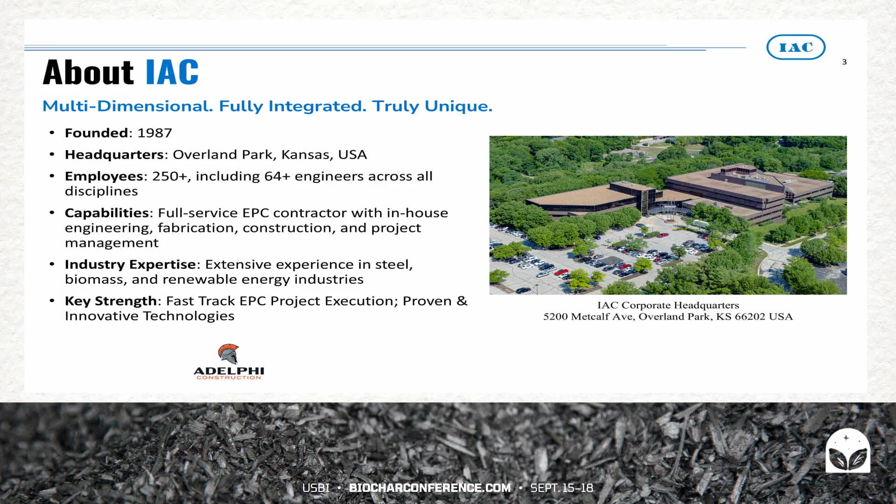A little bit about what we do: we're really kind of an opportunistic EPC contractor. EPC, for those who don't know, stands for Engineering, Procurement, and Construction. Not only are we a contractor, but we are an OEM of air pollution control equipment, primarily dust collectors for particulate control, fine dusts, as well as for hot process gases. Also, we have a thermal group that produces rotary dryers. We've done that in the frac sand industry and in the biomass industry as well, for drying wood products and dried distillers grains in the ethanol industry.

Our focus is primarily on industrial plants, large-scale plants, which Tom Miles and others in their report about 2 or 3 years ago mentioned would be somewhere in excess of 100,000 tons per year. Some may be smaller than that, and we're not going to turn away a project because it's 50,000 tons per year, for instance. But typically, when you build a plant of that scale, you're looking for a reliable plant that's going to run 24/7, 8,400 hours a year.

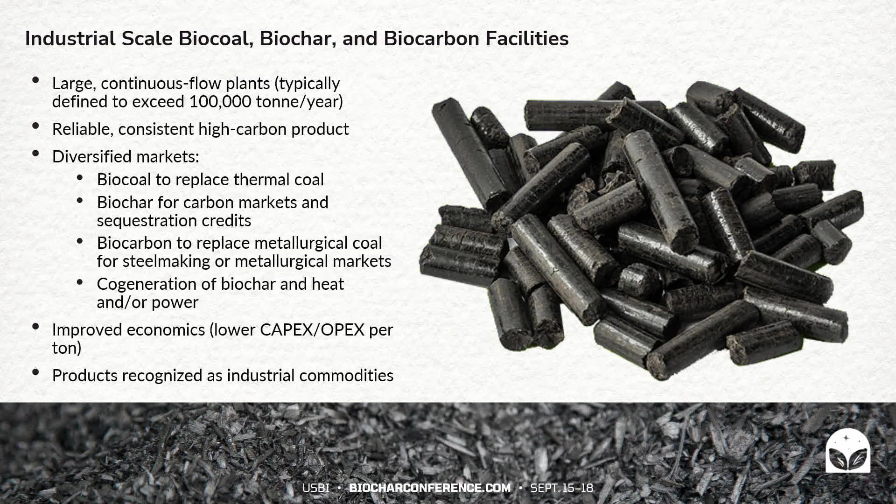And the economics nowadays may very well dictate that you need to do this. In order to do a lot of that, you may have to co-locate a plant near an existing facility, whether it's a pulp mill or an ethanol plant or other potential user, a customer for your heat. Also, the economy of scale for a large plant allows for a lower CapEx and OpEx per ton. And this product is typically going to be recognized as an industrial commodity at these levels.

What we're seeing now is a great interest. There's going to be a demand for electrical energy here in the U.S. because of certain drivers: electric vehicle adoption, shuttering of some of the fossil coal-fired power plants, population growth, climate impacts perhaps from additional air conditioning needs, load reserve requirements. As the demand increases, the utilities have to maintain a certain load reserve as well. Tremendous data center growth, which is occurring at present, cryptocurrency mining, and AI growth, which is going to be, from what we hear, a tremendous driver. A lot of interest from all the large Silicon Valley folks.

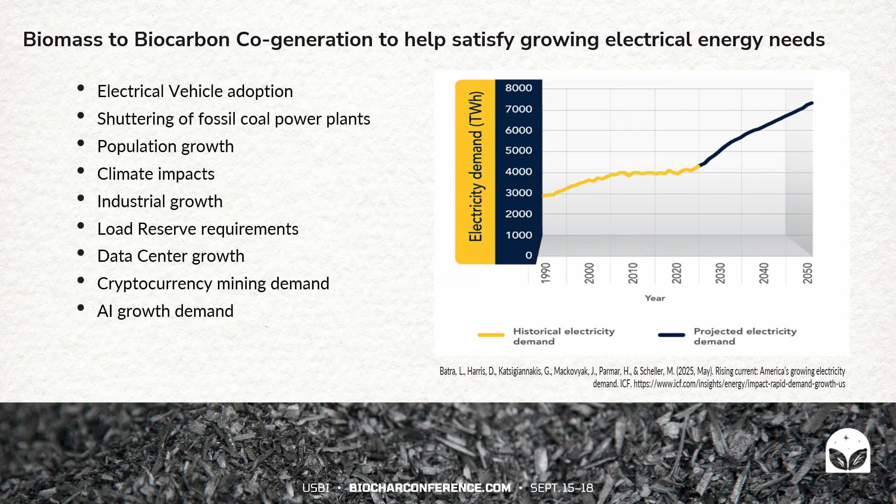Looking at the raw material resources that are available from the 2023 billion ton report assessment, there is over 1 billion tons of available raw material resources, of which forest products is just a small part. If you look at the currently used biomass for energy, a lot of that is essentially corn for ethanol production, oil seeds for biodiesel production. There's a bit of MSW that provides for energy needs. But there's a great interest in forest lands for either fire mitigation, remediating those areas of the forest that are beetle kill, and also to utilize those raw materials that would normally decay naturally. Rather than that, let's take those, let's process those, refine those, so that we can create a biochar that could essentially be sequestered for maybe 1,000 years. So, doing our part to try and reduce carbon emissions.

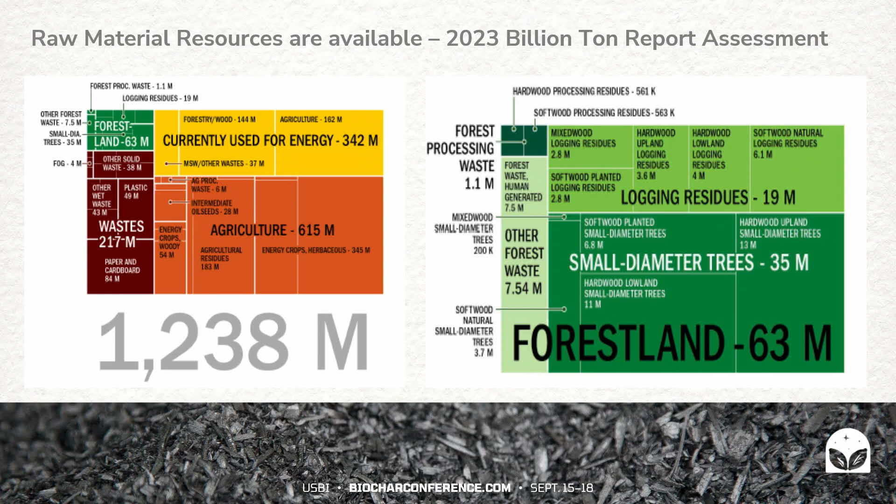One of the industries we've been involved with over the last few years has been the ethanol industry. One of the plants we helped participate in building was Red Trail Energy, located in North Dakota. Originally we installed that plant, along with 3 others, coal-fired fluid bed combustors that then went through a heat recovery steam generator. We placed the emission control equipment behind that, some large bag house collectors along with the ash collection, handling, and storage.

And then because it was coal, we also introduced dry sorbent injection to try and mitigate whatever kind of heavy metals might have been in the coal to begin with.

But the ethanol industry is very active now in pursuing other markets. They've always been forward-thinking. Rather than just producing ethanol as a fuel, they co-produce dried distiller's grains or wet cake if it's not dried, and corn syrups. There's a very pure stream of carbon dioxide emitted from these ethanol plants, which is either marketed to the beverage industry, or now they're looking at sequestering it or using it for enhanced oil extraction. So it demonstrates that once an industry is established, it has the opportunity to bolt on additional markets.

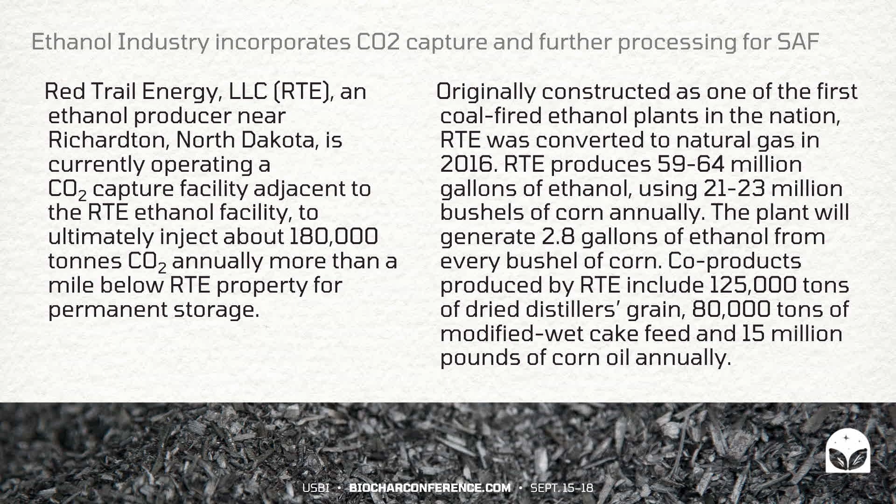So when you look at industrial scale biocoal, biochar, biocarbon cogeneration facilities, there are a number of segments. Those include the transportation routes into, out of, and around the plant, whether by road, rail, or water. The raw material storage and pre-processing, whether it comes in log form, or as chips from the forest where they've been chipped, or potentially large bales if it's corn stover, or maybe sugar cane bagasse or waste from the fields that comes in large bales and must be further ground and processed.

Usually that material needs some amount of drying. You might have moisture content of 50% water. So there'll be a drying step followed by thermal processing, pyrolysis or gasification, and then product cooling once it leaves the thermal process. Depending on the final form factor your customer is looking for, it may be pelletized or at least densified, which may involve adding binders and then cooling it. So that's the solid portion of it.

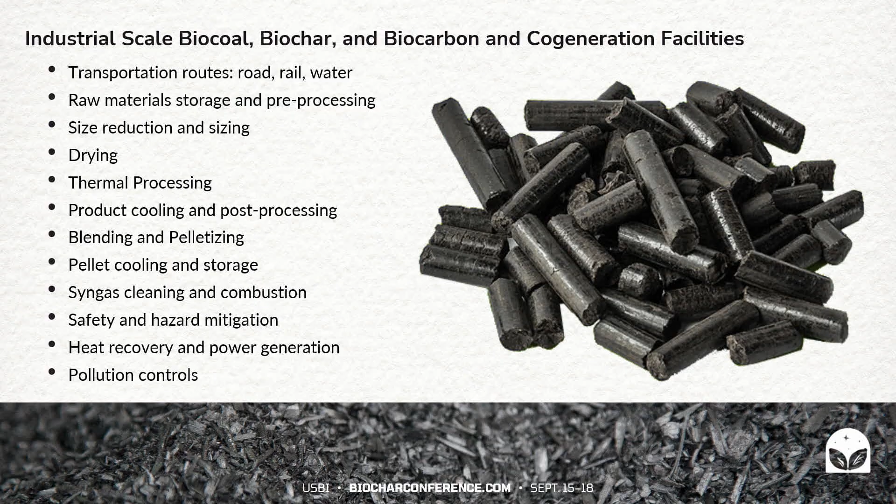The syngas from the process will need cleaning and then combustion to drive the process, or depending on those percentages, it would be sent through a heat recovery steam generator to generate power or steam for a further process. The other thing to always remember in these large-scale processes is the real need for safety and hazard mitigation, and beyond that, pollution controls as well.

So when you look at raw and pre-processed material handling, what we have here are examples of essentially wood chipping and handling. We have partners in our industry that are in that particular business, and they have a great interest in using those materials as raw materials.

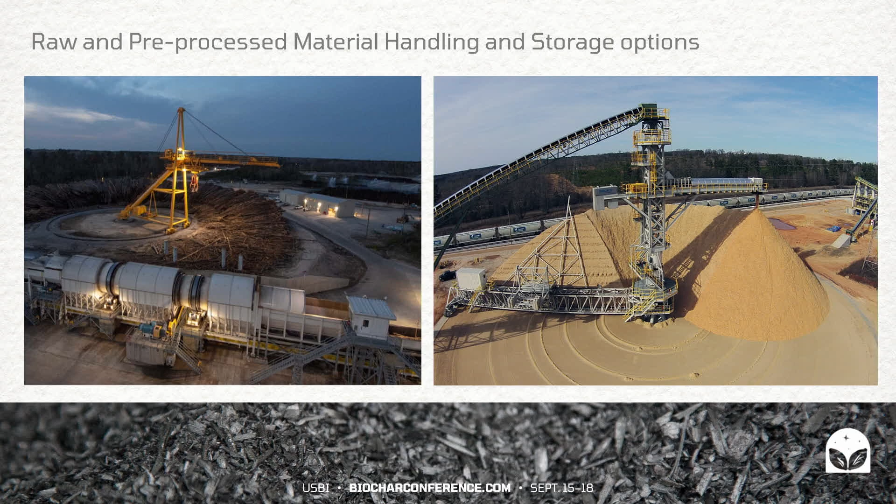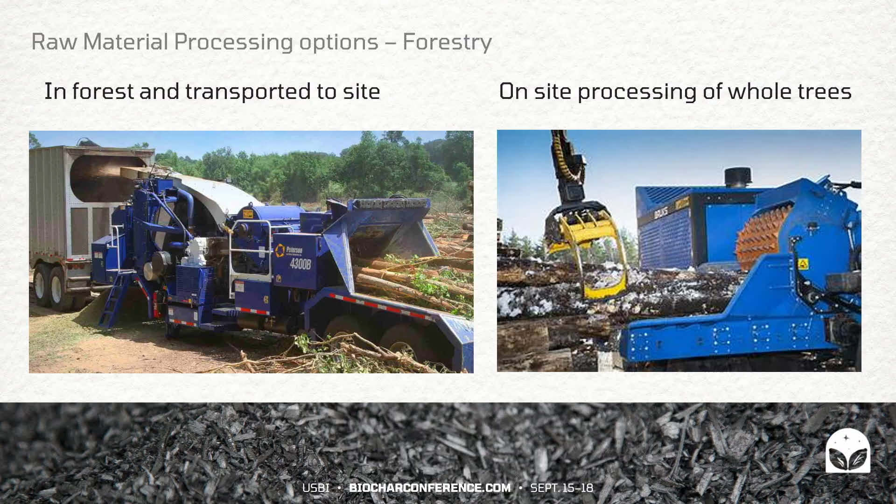So that raw material then has to be transported and further processed into smaller sized particles. You're looking at taking green raw material and processing it either with mobile equipment in the forest, or processing it on site through some form of whole tree chipping.

When you look at drying, rotary dryers have been involved in the forest products industry for drying wood chips and materials for decades. They originated in the alfalfa dehydration industry in the Midwest, and those companies based in Kansas actually sold those dryers into the forest products industry back when we were first making particle board. We grind wood up, make small particles, and that became strand board and later wafer board or medium density fiber. So a lot of those dryers originated in the forest products industries.

Those are higher temperature systems, meaning the inlet temperature may approach 1,000 degrees, or furnace gases in excess of that, 1,700-1,800 degrees. With our dryer systems, and many others as well, we use exhaust gas recirculation to take a portion of that and provide a safer environment with higher moisture content gas that is recirculated, driving down the inlet temperatures to protect the wood going through the dryer system from being over-dried, scorched, or case hardened.

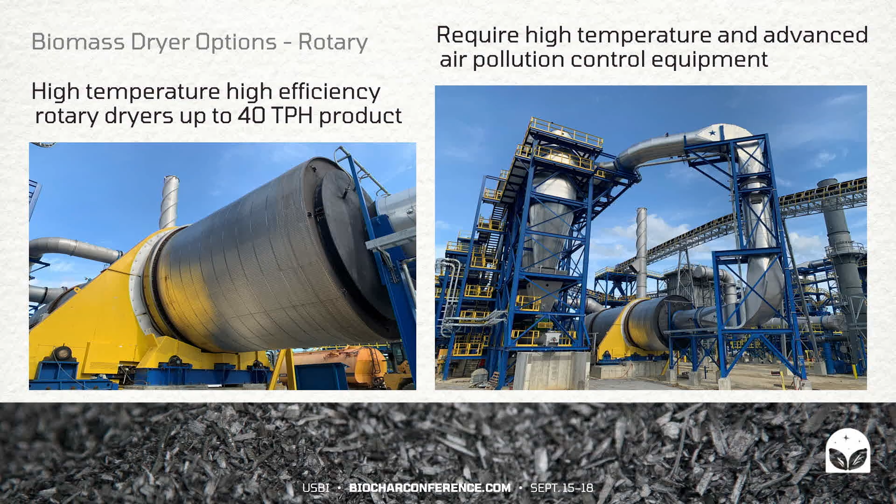Those are typically followed by a wet ESP or maybe a regenerative thermal oxidizer. There are lower temperature dryers, which have high gas volumes but lower temperatures to get the same kind of results. Those might be belt dryers, or they could be a rotating disc dryer, similar to those that Dryer 1 in Belgium is producing.

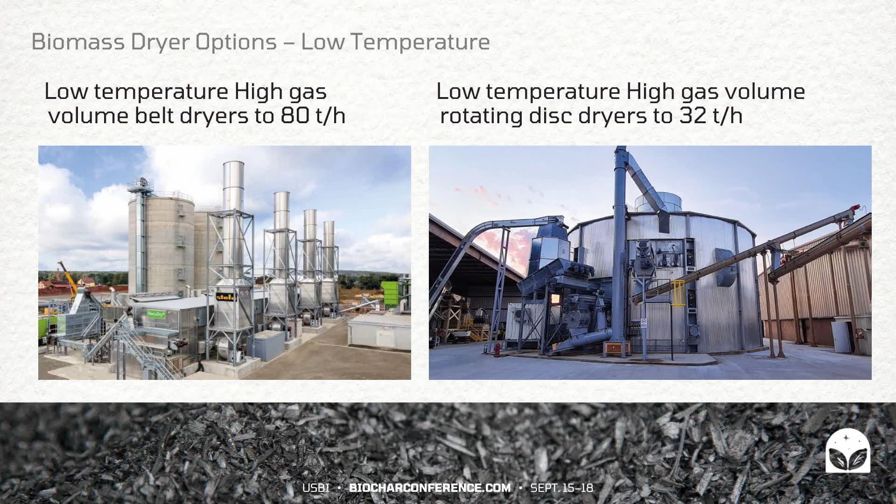Belt dryers are typically European designs as well. On a small scale, they may very well not require any kind of further air pollution mitigation, much like a small rotary dryer with a single cyclone collector may not require it as well. So it's really dependent on the volumes, the type of wood, and the emissions that might be expected from those.

So pyrolysis reactors, thermal reactors, these are mature designs, looking at usually indirectly heated calciners, or they may be some that are more directly heated as well.

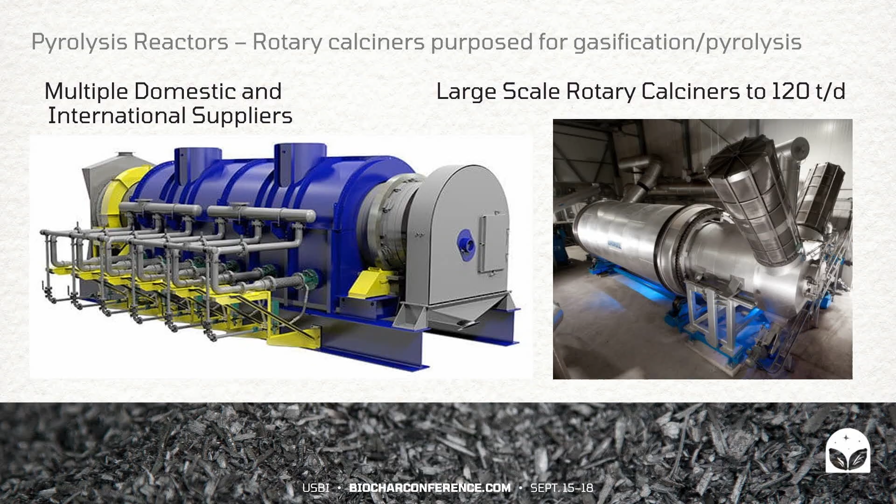So those are, like I say, mature. They have limited outputs, so in many instances you're going to have to gang a number of those together. They're quite expensive. They operate at very high temperatures, and so the interior drum is usually made of a very exotic steel. And they see a lot of growth as the steel is heated up. They're quite expensive as well.

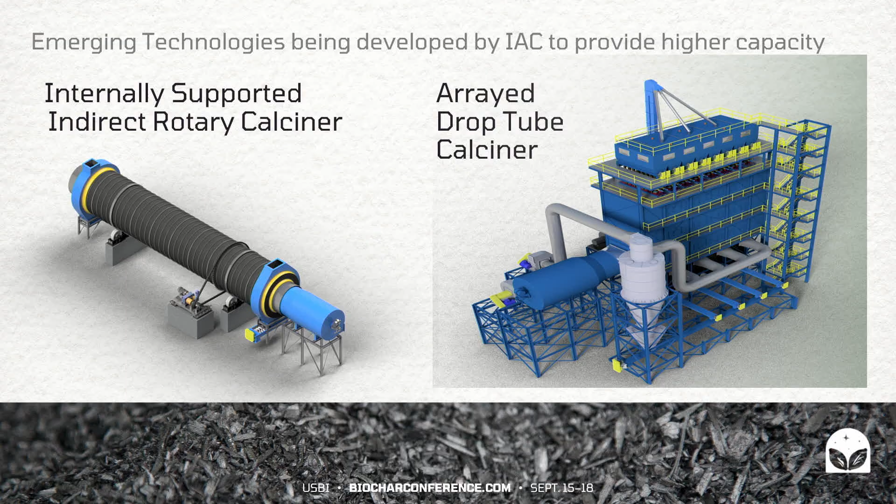So IAC is working with our partner company, looking at ways to use indirectly heated rotary calciners, which could be used for mineral products as well, but specifically for the forest products industry. We'd invite you to come by our booth and visit with our technology folks there to learn more about those. Typically, we're looking at very high volume machines here.

So depending upon the form factor of your final product, you're going to be looking to densify that. A lot of the densification originated from the feed milling industry. The original white wood pellet mills used the horizontal ring die pellet machines, and then the folks from Europe brought the flat die machines, which offer a very good alternative.

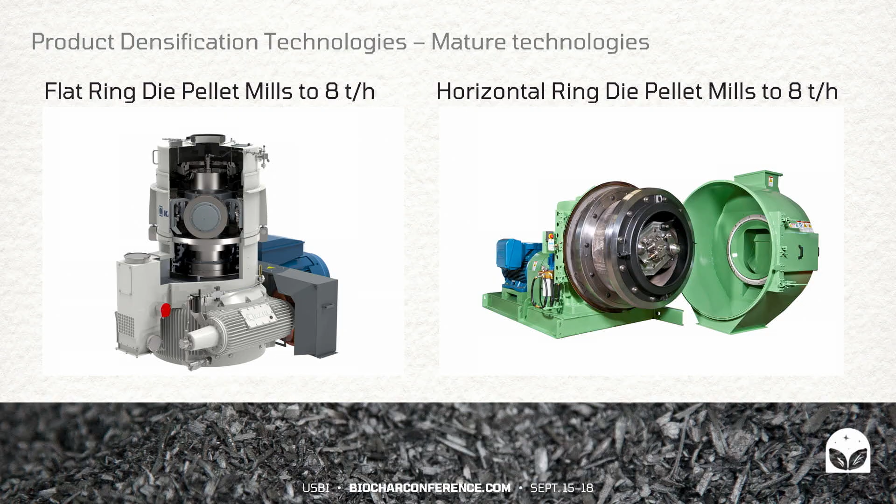Newer machines now look at pin mixers, which some folks are here at the show that you can visit with them about. Typically those are going to produce a very small particle or granule that will then have to be further agglomerated in some kind of disc pelletizer, or you can put the material through briquetters.

When you get to a material like biochar, you're going to need some form of a binder, along with probably a great deal of water, to be able to get a pliable mixture to create the final pellet.

In the whitewood pellet industry, there's enough lignin left in the wood to maintain its shape as it goes through the dies. As the whitewood industry was looking to create torrefied wood pellets, they have to look at reducing some of that through the torrefaction process, roasting it out. So they may or may not have sufficient lignins left. As a matter of fact, there are some whitewood pellet producers that actually add lignin and other fillers to their material as well.

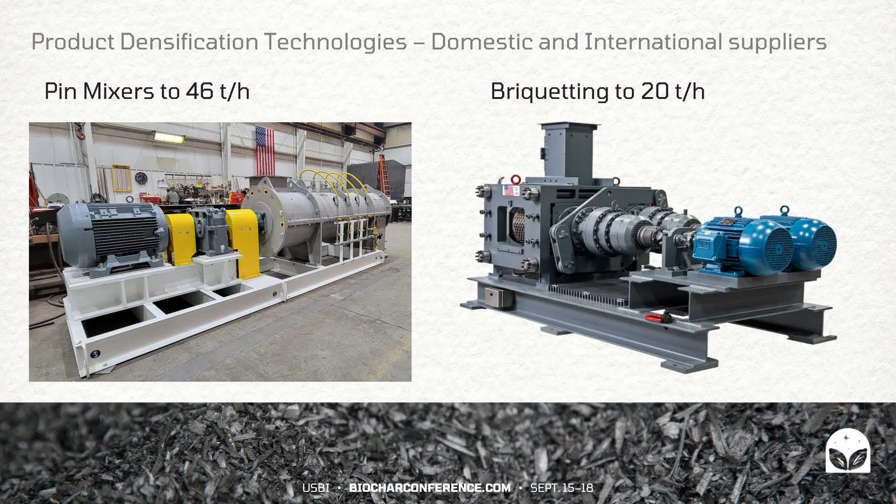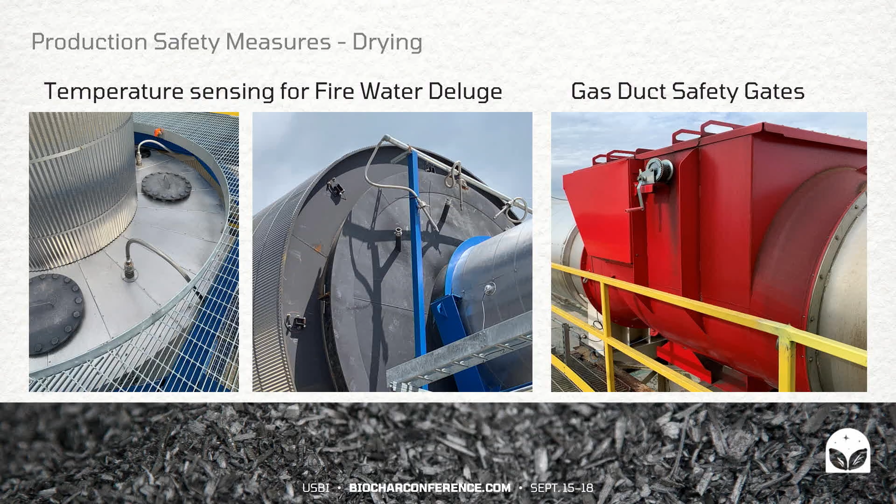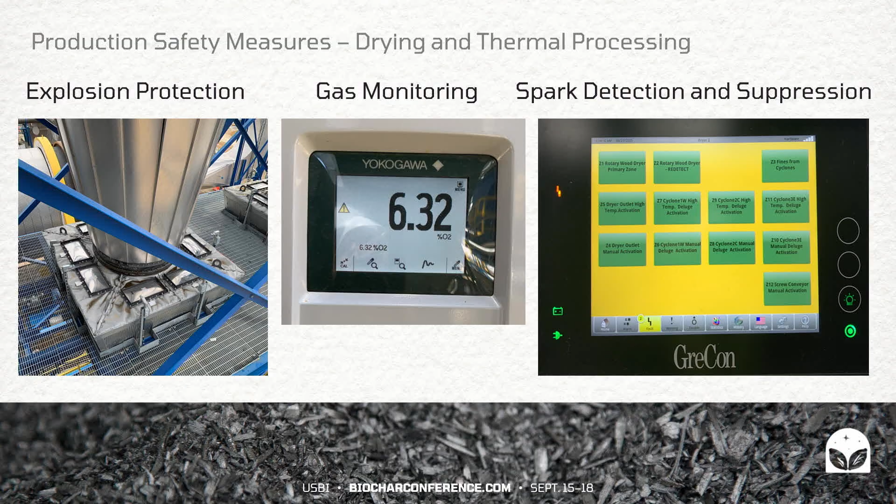Important safety measures, especially for drying, would be any kind of fire water deluge activated by temperature sensors, gas duct safety gates, explosion protection in the way of explosion vents, gas monitoring, and then spark detection and suppression using infrared detectors and very high pressure short bursts of water spray to extinguish sparks as they're entrained through the gas stream.

Solids storage considerations - there was a very good speech yesterday about some of the opportunities for storage of these materials. I think we're going to find that large-scale storage is probably going to have to be resolved. Explosion venting, of course, would be required.

Nitrogen blanketing, which is kind of borrowed from the petroleum industry. There have been a number of cases where storage silos have burned, even with white wood pellets, for an extended period of time. There's also concerns about ocean transportation, even with white wood pellets, where volatiles may still be emitted as these pellets are transported across the oceans.

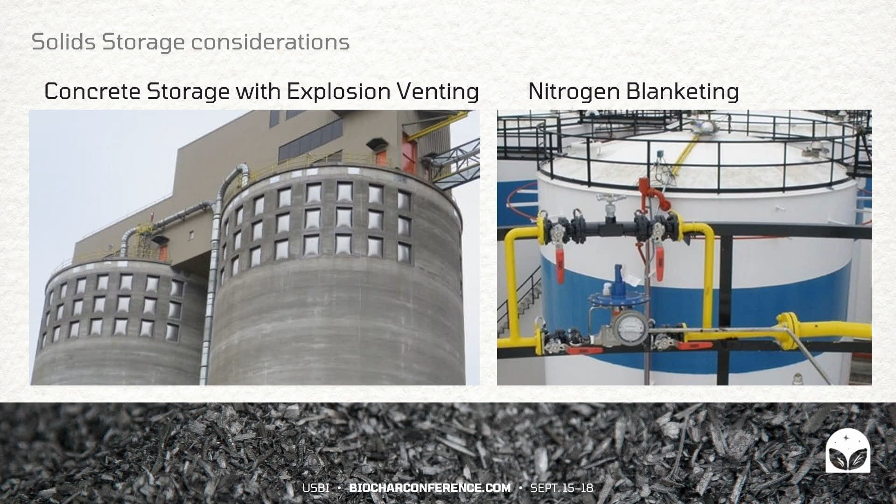So those concerns would also need to be realized with biocoal or torrefied pellets, or also with any kind of biocarbon or biochar products. Transportation and safety of that, and storage, are going to be paramount.

Cogeneration - there are modular gasifiers, which the fine folks at PYREG have offered. Also some larger scale auger gasifiers that provide the gasification chamber followed by thermal oxidation, and then that heat is sent through a heat recovery steam generator to generate both power and hot process steam for the host plant.

Typically those large-scale units are going to be located and co-located with other major users of that kind of heat, whereas a smaller modular unit may very well be located in some remote area to provide not only its own power, but power to the grid for remote rural localities.

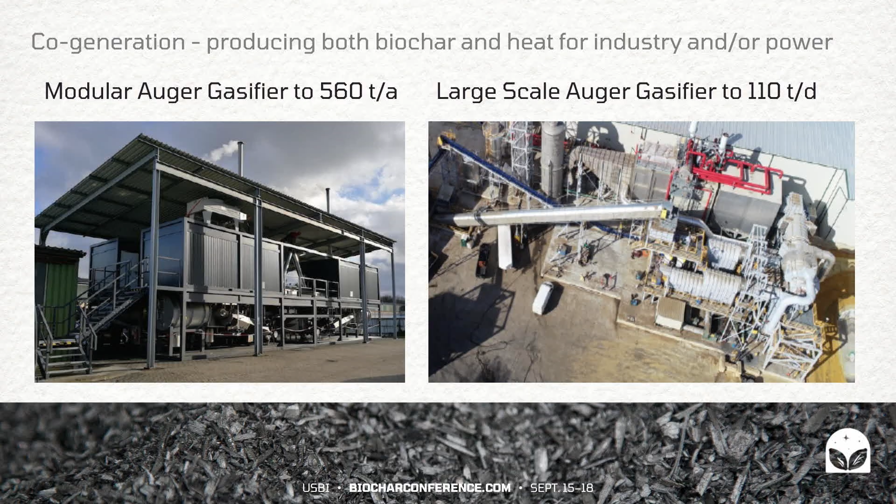The HRSG, heat recovery steam generator - there are several suppliers of those, and steam turbines. The ancillaries mean that you have to have the water treatment for the boiler system. You'll have to have condensers, either water or air-cooled condensers, and a whole host of equipment that accompanies a heat recovery steam generator.

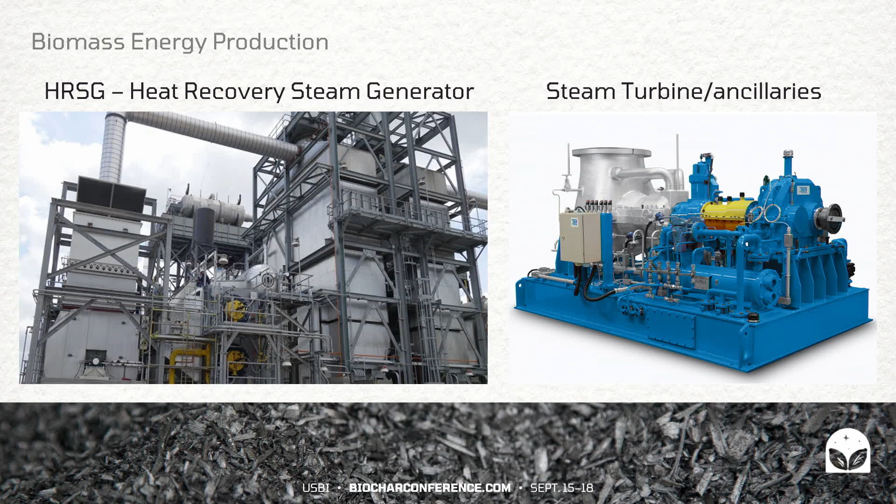For mitigation of hot process gases on large-scale rotary drying installations, you'll be looking at a wet ESP, followed with an RTO, the regenerative thermal oxidizer. The wet ESP is there to knock out particulate so that it can avoid poisoning the beds on the RTOs. And we're also seeing a lot of SNCR, selective non-catalytic reduction, with injection of urea for NOx reduction as well, especially on such large processes with such large volumes.

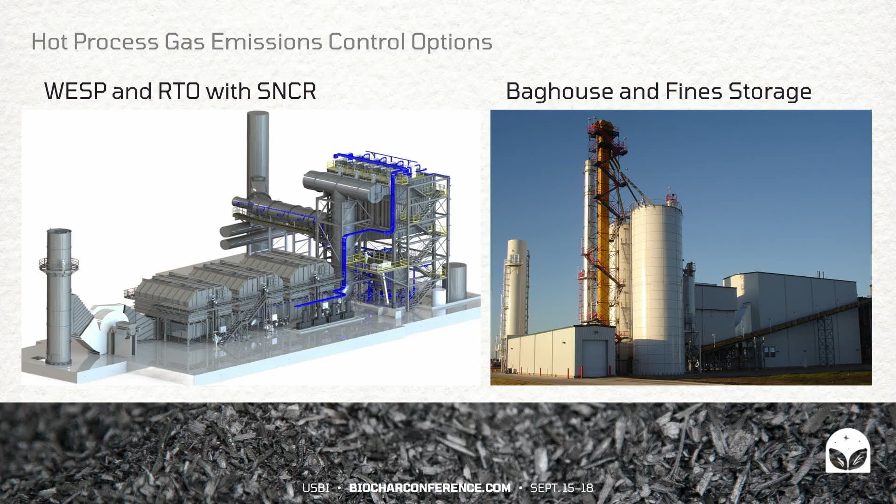So when you look at some of the scale of ethanol production, it scaled from a mere 20 million up to 400 million gallon per year plants in just over 20 years. And essentially, ethanol production helped save American farmers.

There was a period of time when corn prices were so low that farmers were going out of business. So they welcomed the opportunity to provide ethanol to help supplant the existing petroleum, the gasoline that we use in our fuels. And so now you're looking at 10%, 15%, even more for certain engines. And so that's been a real lifeblood for rural communities.

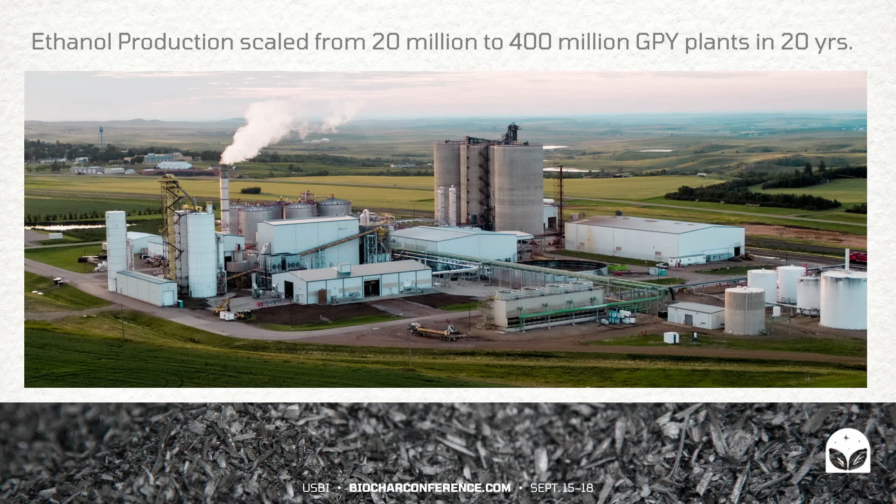Another industry that we've been involved in was frac sand, and maybe a lot of people don't know this, but most frac sand is dried, and it's dried only because you can't screen wet sand.

About 10 years ago, most all of the frac sand came from Wisconsin, St. Peter Formation, Minnesota, Wisconsin, in the upper Midwest and along the Mississippi River. And then it was loaded on rail cars and then shipped down to the Permian Basin or to Oklahoma, Louisiana. And what you'll find is that a unit train, 100 cars, is like 100,000 tons, is going to go into one bore. And so it was becoming prohibitive to have to ship that all the way from the north down to the southern states. So they looked for another alternative, and they found sand dunes in Texas and in Oklahoma.

Maybe they're not perfect, but they're good enough. And so it started an entire gold rush, if you will, for local sands, where they merely had to scrape off the top of the dunes and then extract it, wash it, and then dry it, screen it, size it, put it in silos, and then load it out for use in the fracking wells.

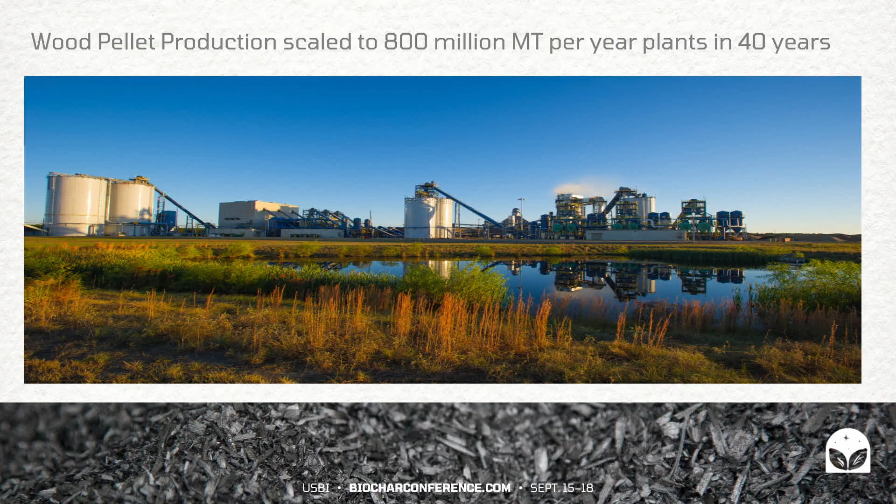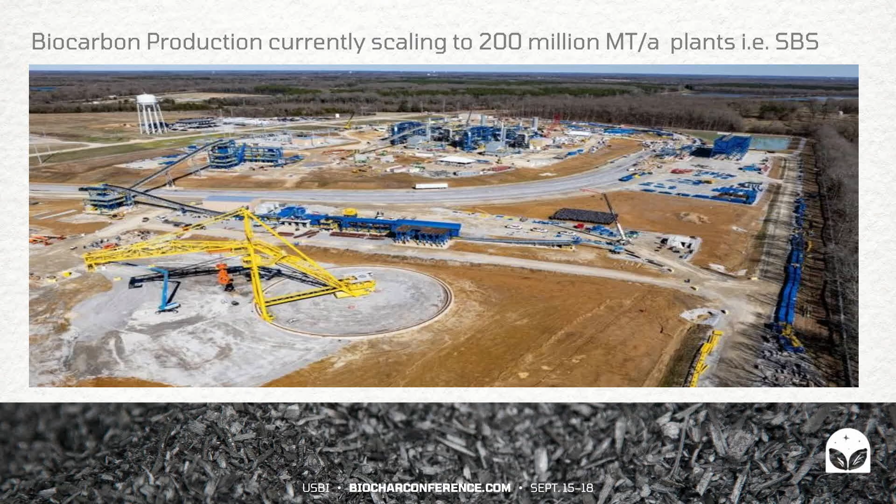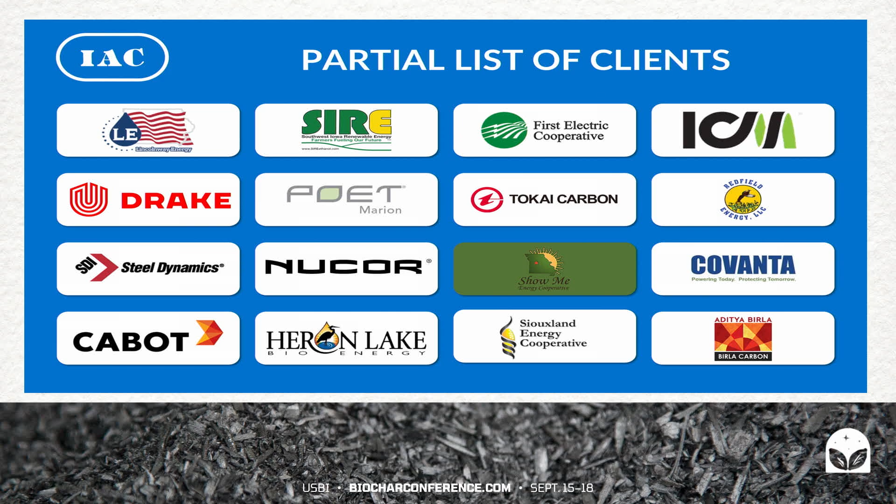So we see this as being just really the first. There's efforts being made in Europe and in Canada as well for the steelmaking industry. They're looking to try and reduce their carbon footprint. There may very well be other markets that are going to present themselves. And what we would just like to be remembered as is a contractor who can assist in trying to create those much larger plants and larger facilities.